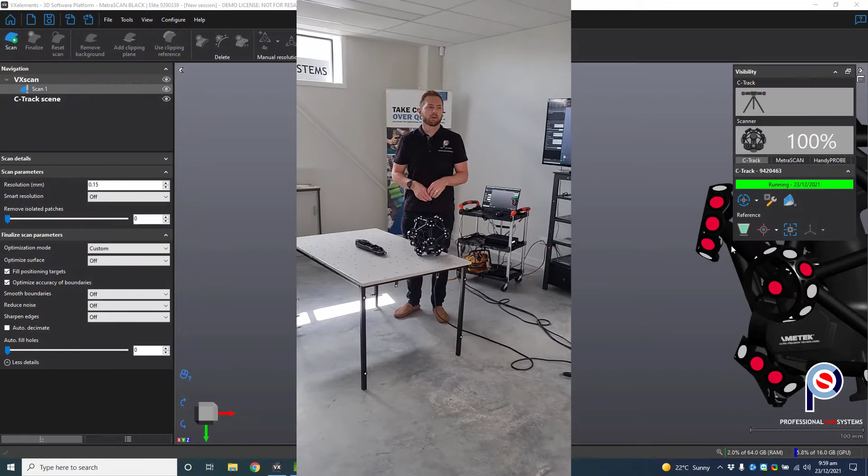Today we're going to show you how to reverse engineer this motorcycle part. It's a very complex shape, nearly impossible to measure with traditional measuring techniques. So we've got Creaform's MetraSCAN, and we're going to show you how to get up and running.

The first thing I need to do before we get started is acquire the targets that I've put on the table, and that will ensure that if this table moves in any way, it's tracking the movement of the part. So we go out into the software.

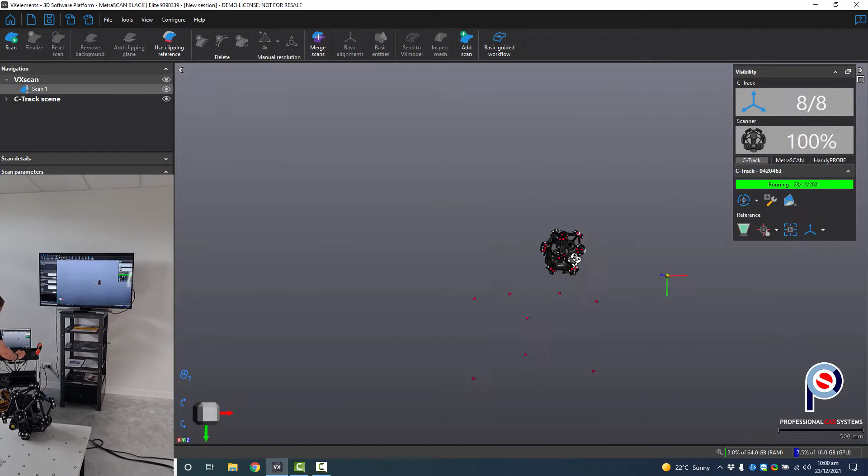I can go and select manual detect, and I just simply drag a selection around those targets and accept it. You can see it's already registered the targets, they're in red. It's already tracking the MetraSCAN. You can see it on the picture. The C-Track's keeping track of that.

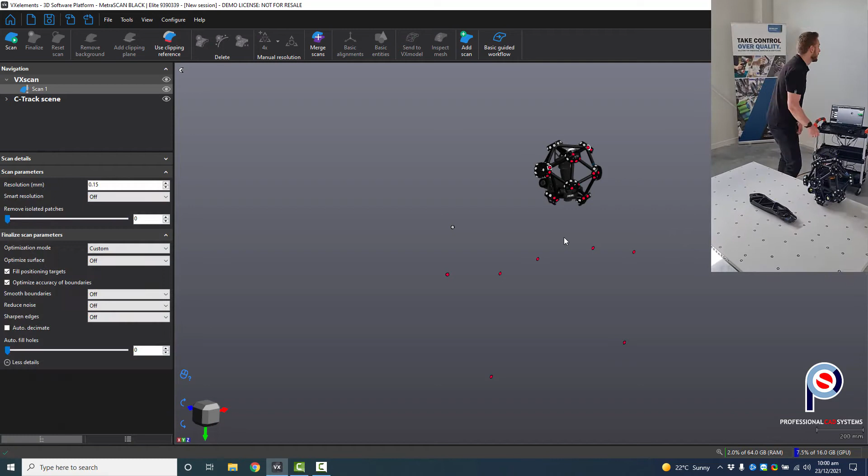Next what I need to do is determine what resolution I need to use to capture the part. So I can go over to the left hand side and I can change the resolution maybe to about 0.8.

What's cool with our software is that we can also adjust some settings before even getting started. So I can click on auto decimate, and we'll put large triangles in the large surface areas and keep small triangles in the small or the high detailed areas.

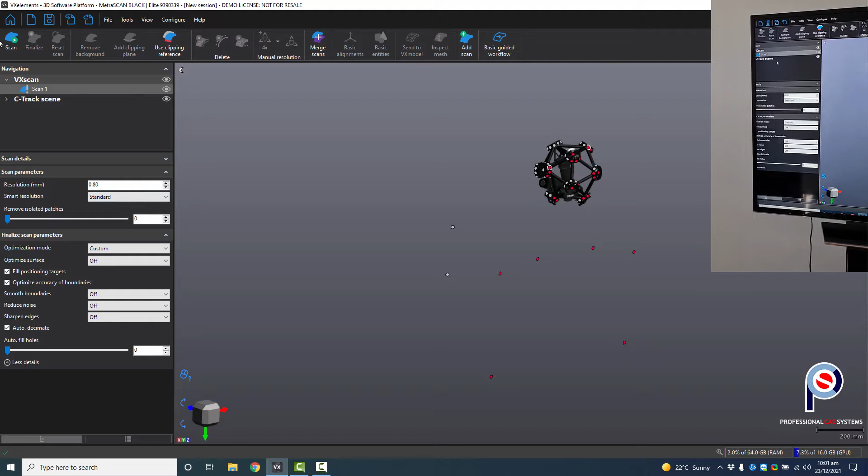We also have a thing called smart resolution. What it will do is put small triangles on the high detailed areas and use bigger triangles in the larger surface areas. Next what I'm going to do is hit scan.

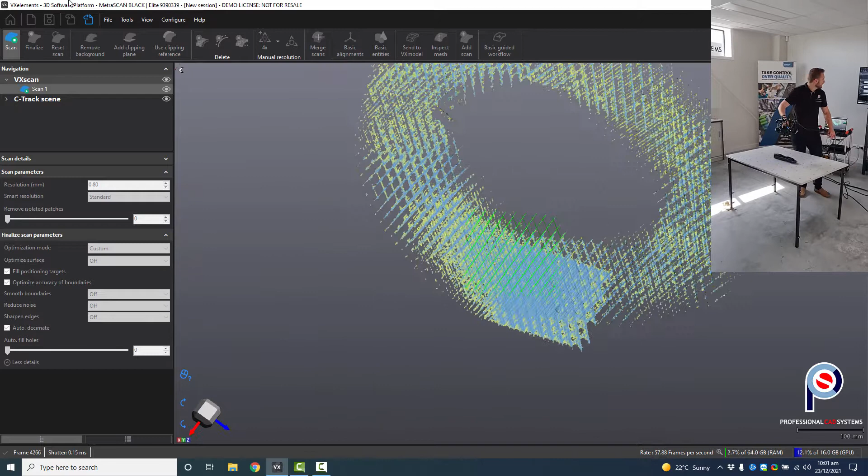Cool. And then I just need to capture a little bit of the table because I basically want to remove that. So just simply scan a bit of that, just enough so I can create a clipping plane.

So next I can go add a clipping plane and just delete that out, because I just don't need it.

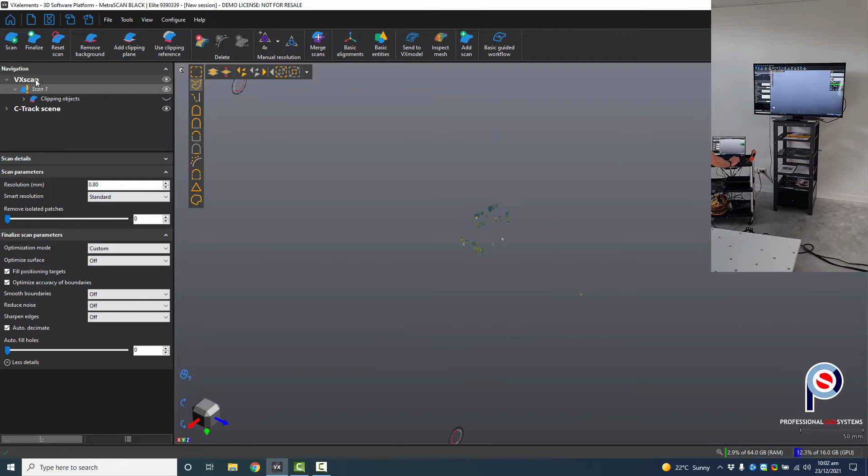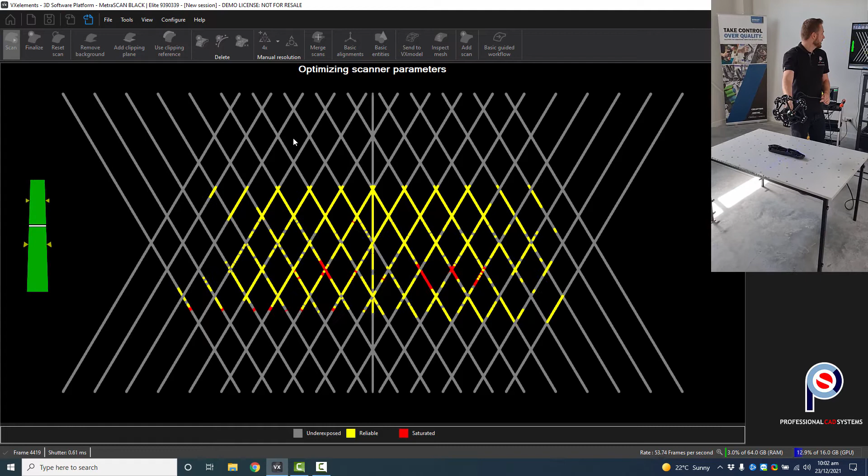The next step is I need to adjust my shutter speed for the laser strength for the part. So I've got these multi-function buttons on the back of the scanner. I can hold the tick down, scroll down to auto adjust, accept that, aim it at the object, and it will automatically adjust to suit. Once it's done, it will exit.

And so at this point, I'm ready to start scanning. I can hold the trigger down on the front of it. That will start the session. Then tap one more time, and we'll start to collect it.

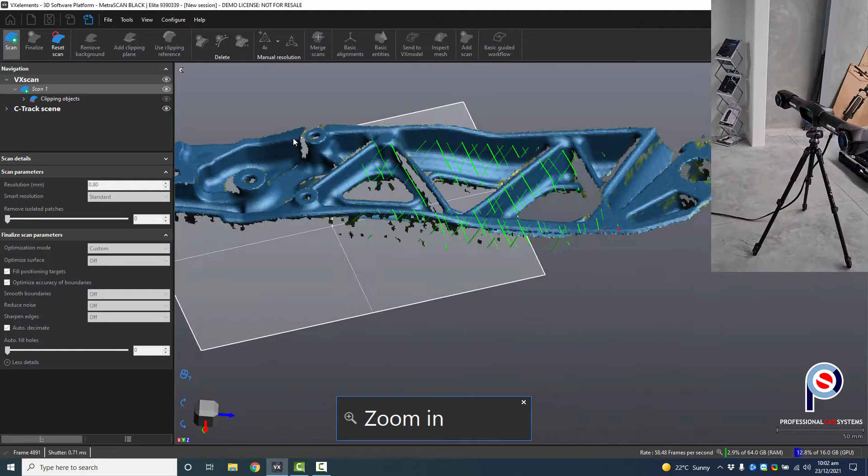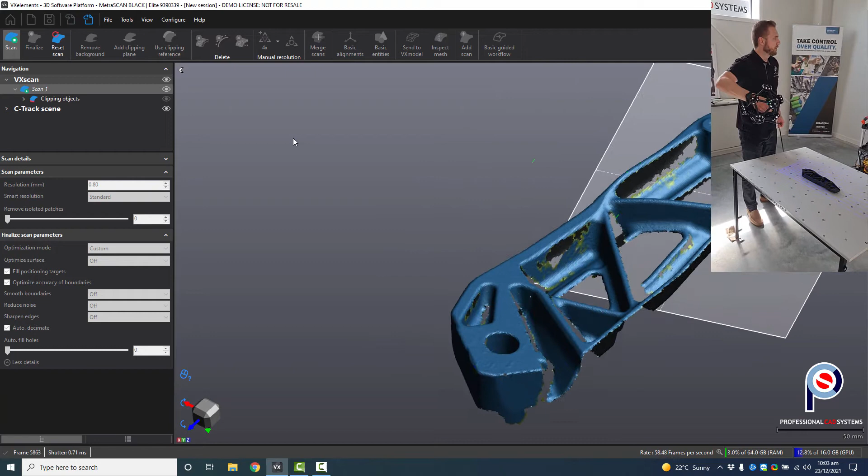So it's just like 3D spray painting. As I go over and over it, it just keeps filling in the gaps. What's quite nice is it has like a distance meter on the lasers on the screen. So if I get too close, it will go red. Too far away, it will go blue. So you're just aiming to be in the green zone.

But it's a very fast scanner. You can just sweep over and over the part as many times as you like, and it will only ever create a single surface.

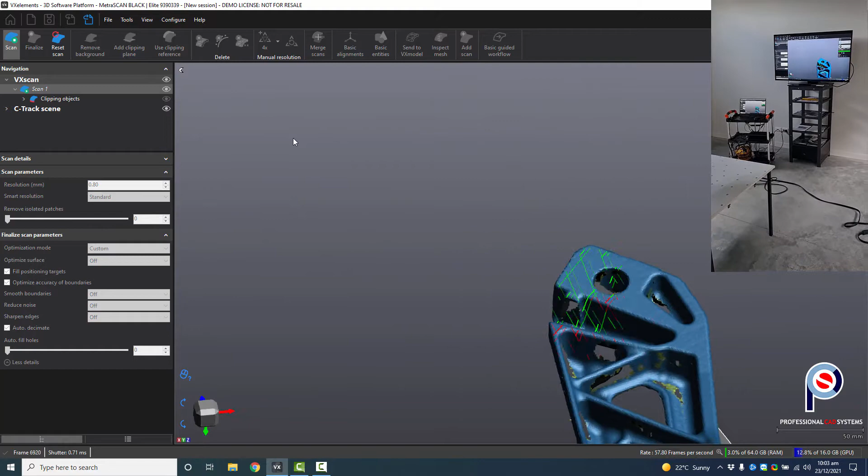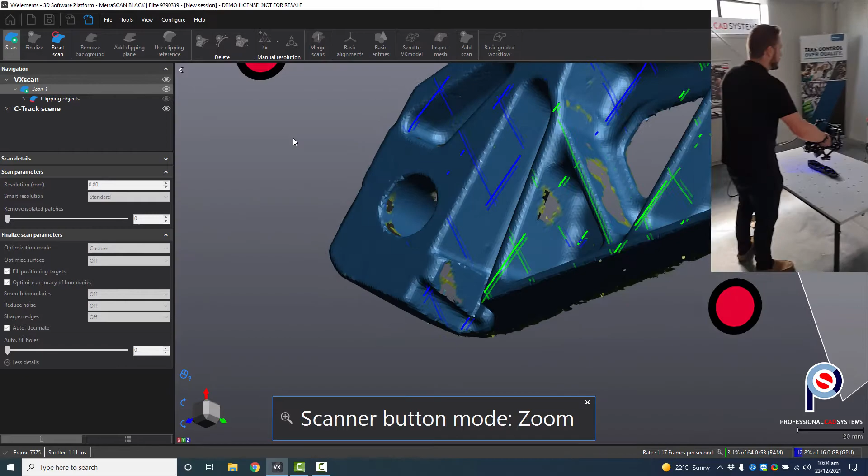If your laser strength isn't quite enough, you can toggle between zooming in and shutter speed. So I can just increase that a little bit more. And then I should be able to capture the surfaces a bit easier now. That's better.

So we'll just go around, make sure we haven't missed anywhere.

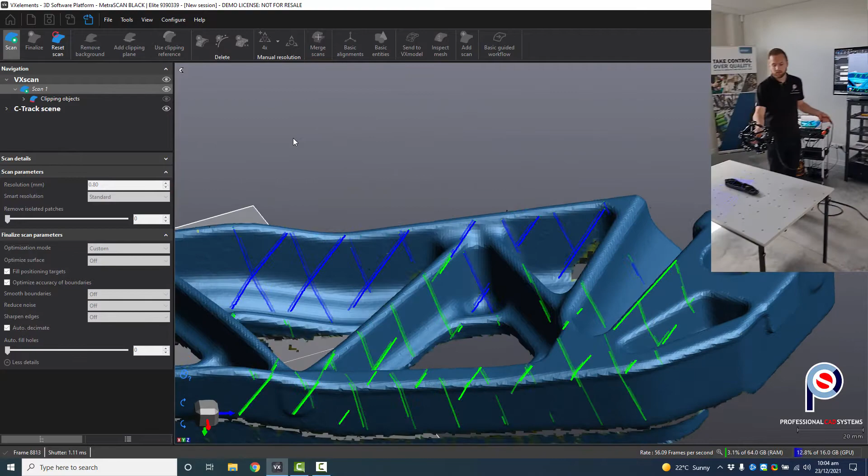What's also quite nice with the Black Elite model is that we get a single laser. So if I double tap the trigger, it'll go down to a single line. And it just makes it a little bit easier getting into those hard to reach areas. Plug in there.

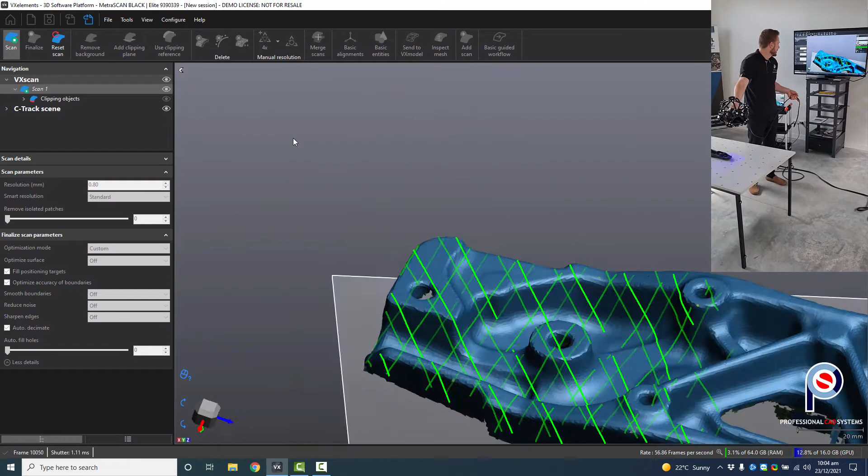You can just flick back to the other laser mode.

Okay, so that's one half done. We can hold the trigger down and press stop.

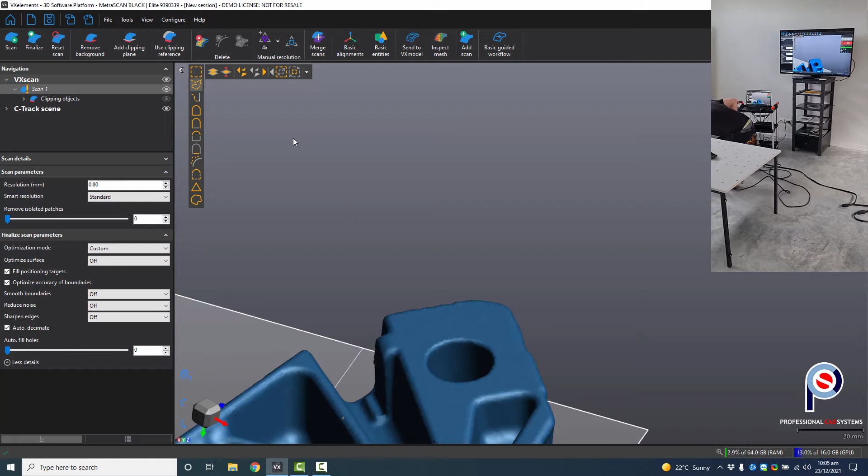Then what you need to do to add the second half is we just click on add a scan, and we can copy the clipping objects. So we'll copy that clipping plane that we created, and then we can use that. It also copies the mesh, so I might delete that.

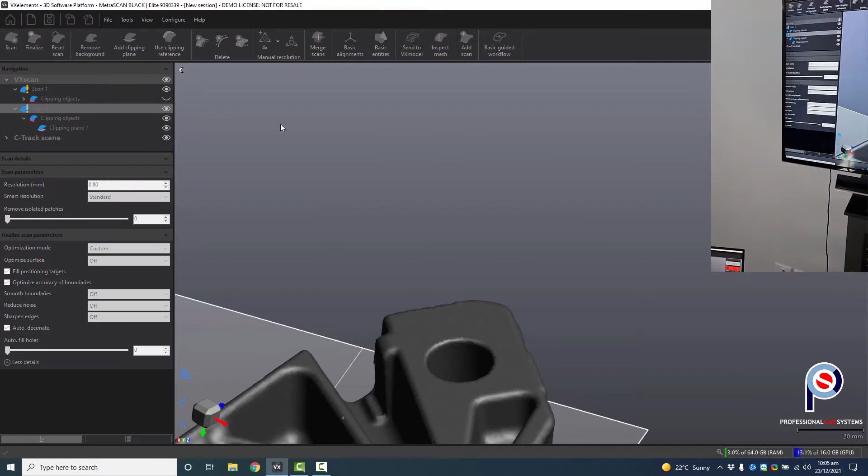Hit scan again, and now we just need to turn the part over. Okay, so when you're ready to scan the other half, again you just hold the trigger down, tap the trigger one more time, and just start scanning again.

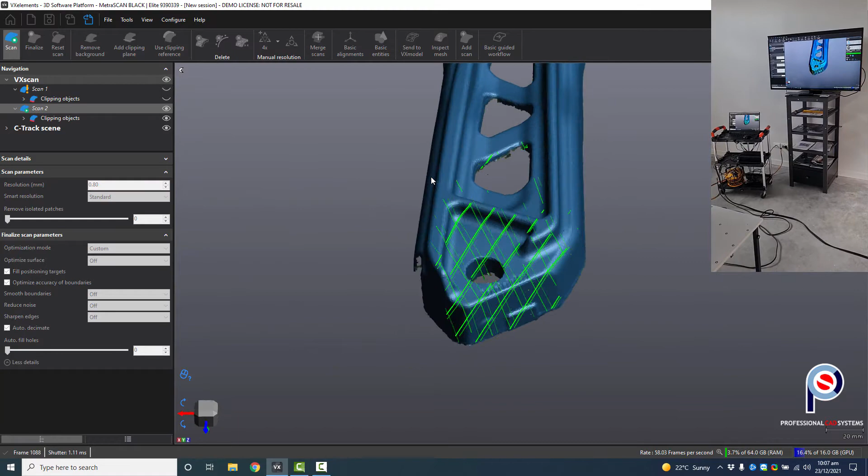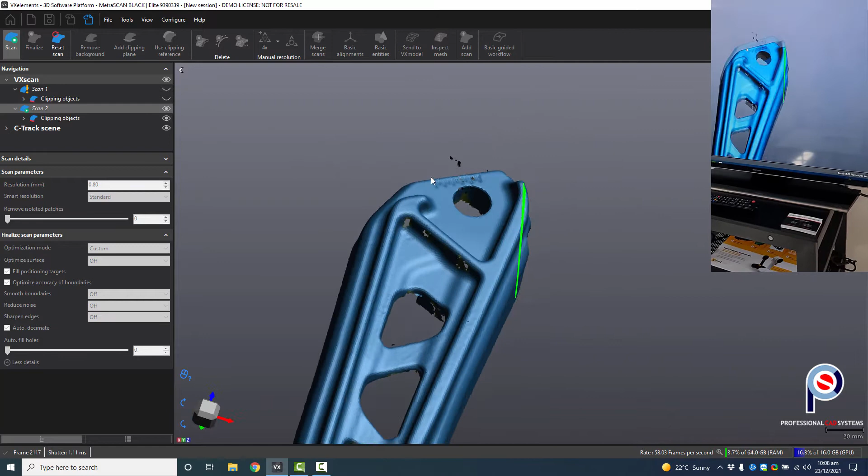And again, I can double tap the trigger just to get into the hard to reach areas. It just gets deep into the holes. So basically it switches to a single lens when you go to the single laser mode.

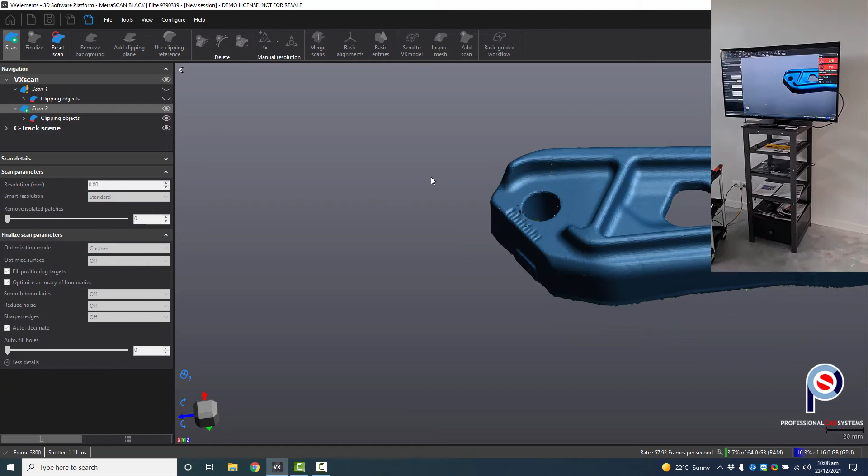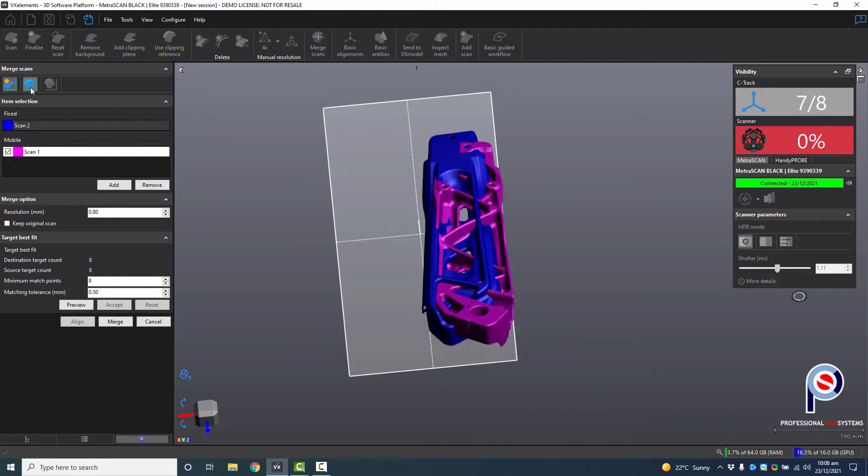Good. So once you're done, you just hold the trigger again, stop the scan, and now we can look at merging the two scans together. So we can go up to merge scan, and we can do a best fit alignment, and we can just click keep the original scans just in case you want them, and we can click best fit automatic alignment, and it should find enough common geometry that it knows the overlapping data.

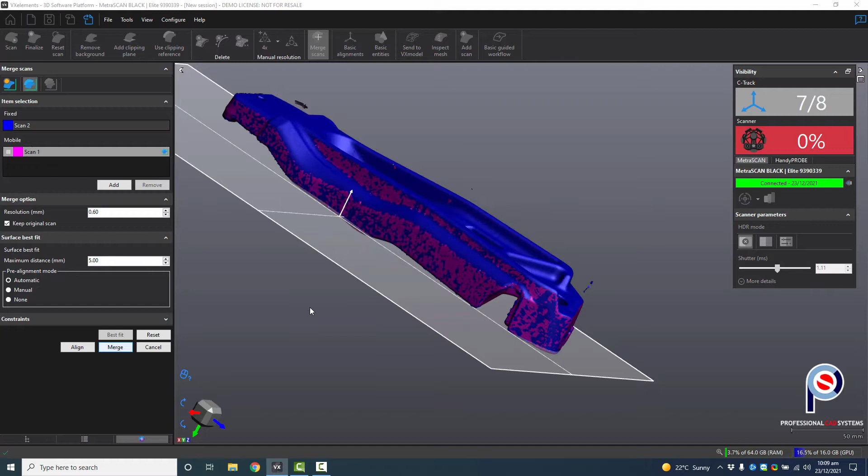And at this point, you're not stuck to using 0.8mm triangles. You can actually increase the resolution even further if you wanted to. So I could say maybe like 0.6. And it will recalculate, redraw on the raw information and reproduce an STL mesh based on that data that we've got in the background.

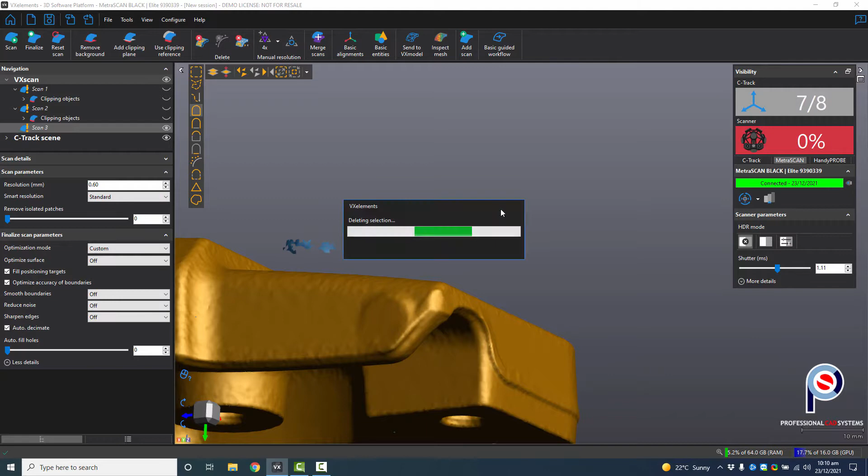So now if we turn off scan 2 and scan 1, you can see we're left with that part. If I get the select tool, I can select all I want to keep because there's a little bit of floating data somewhere, like here. So I select what I want to keep, click on the keep selected delete tool. So keep what you've selected and it will filter out anything else. And once you're happy, you just click on finalize.

And it's just going through and adding in those post or pre-processes that we put in place, the auto decimate, any hole filling and stuff like that. And there's the finished result.

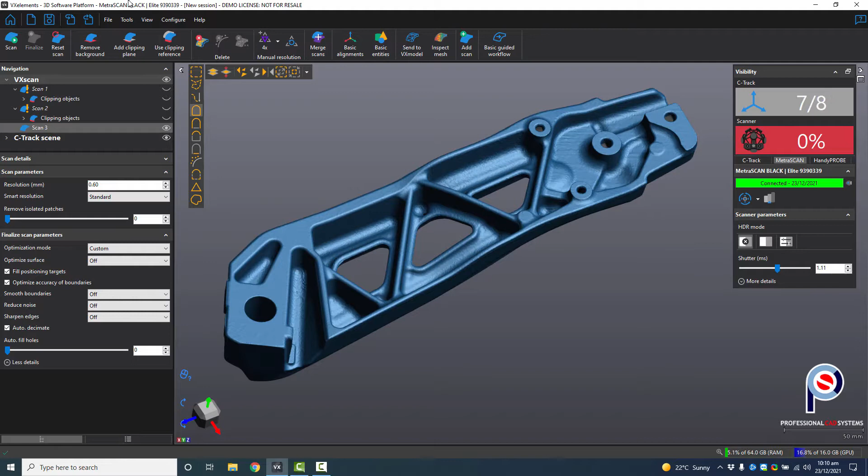So when you're happy with your information, all you need to do is export to mesh. So we just go File, Export, Mesh. And then I also like to save the session because that contains all that raw information if you ever want to change the resolution, add more detail.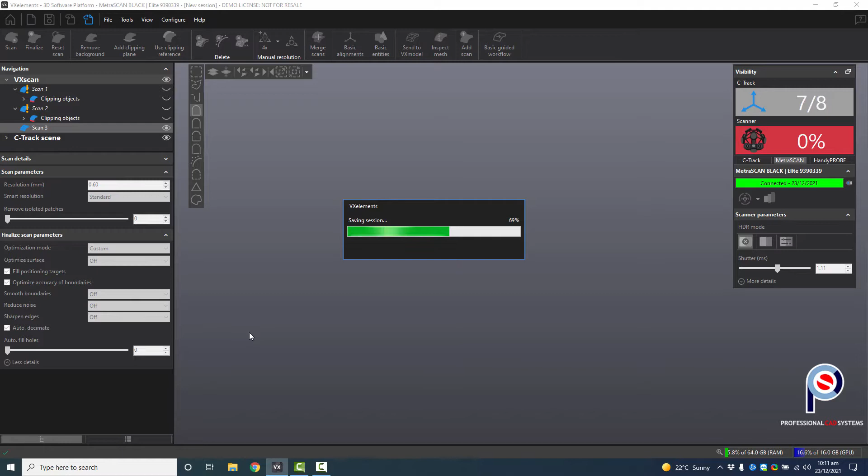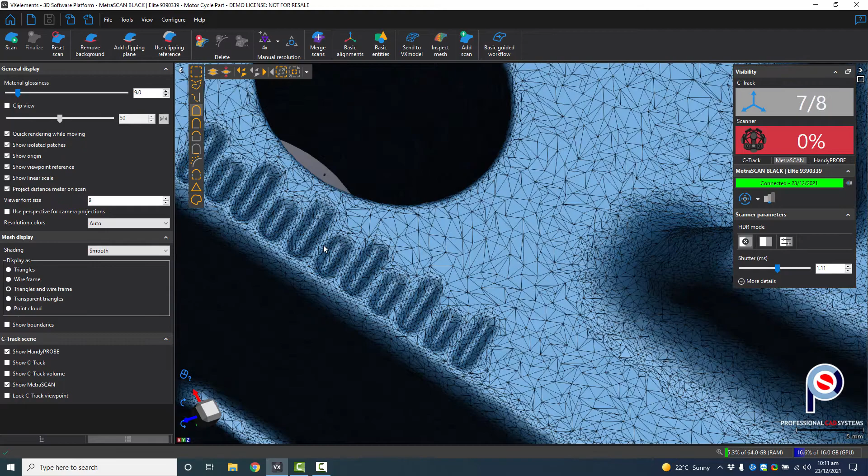And then lastly, before we stop the scan, I'll just show you how it looks, how the triangles are formulated, how they're all stacked together. So you can see the details that we're getting here. If I go to there, I can go triangles and wireframe, and you can see there's the larger triangles, and on the smaller or sharper edges, you can see it's got more triangles, more density. So it really optimizes the mesh for you to export and use for reverse engineering.

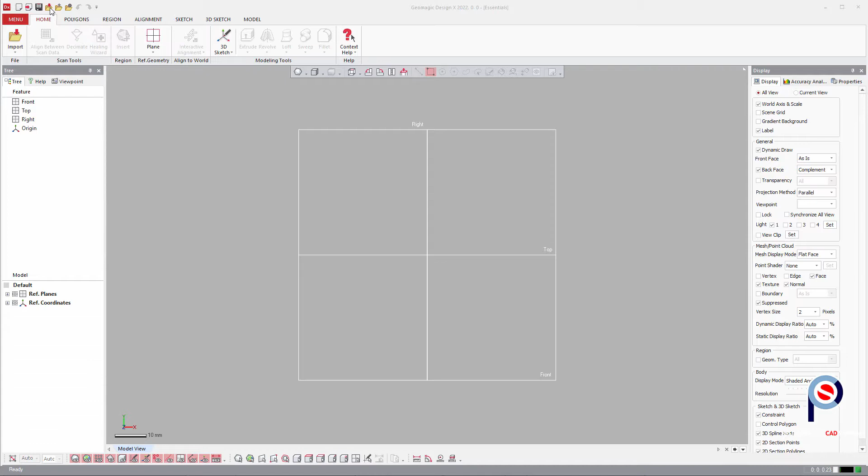Okay, so now that we've finished 3D scanning the motorcycle part, we're going to look at Geomagic Design X Essentials to reverse engineer the part. So first we need to go to Import, and we can import the STL file, and it comes in as a mesh, obviously.

So what I'm going to do is just create a couple of regions, and regions are useful for extracting things like planes or cylinders. So we're going to grab the Smart Selection tool, and I'm going to left click and drag my mouse up, and it will start to find that plane.

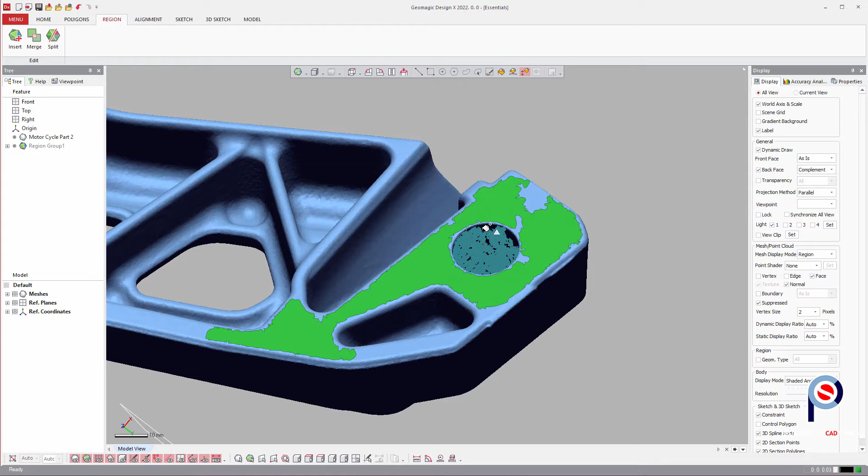Then under the region menu I can click Insert and just insert a plane. Go to the cylinder, left click and drag it upwards, and it just starts to select the cylinder. Insert. On the side here we're going to add a plane, and then insert. So I'm just creating these features or these regions to help with my alignment.

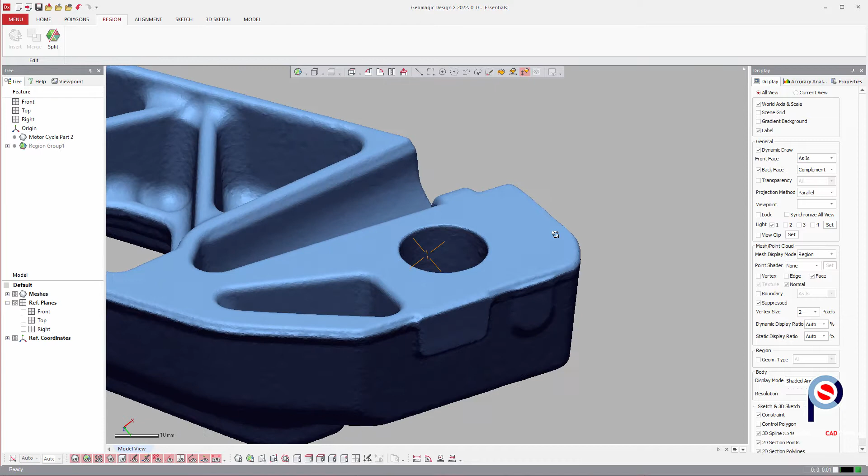Okay, and then before we carry on, next we'll go to Model, and I'm going to add a plane. So I can now filter and find regions, and click on that plane and go Preview, and it fits a plane onto that region real quickly. So it's quite useful for quickly selecting things as well.

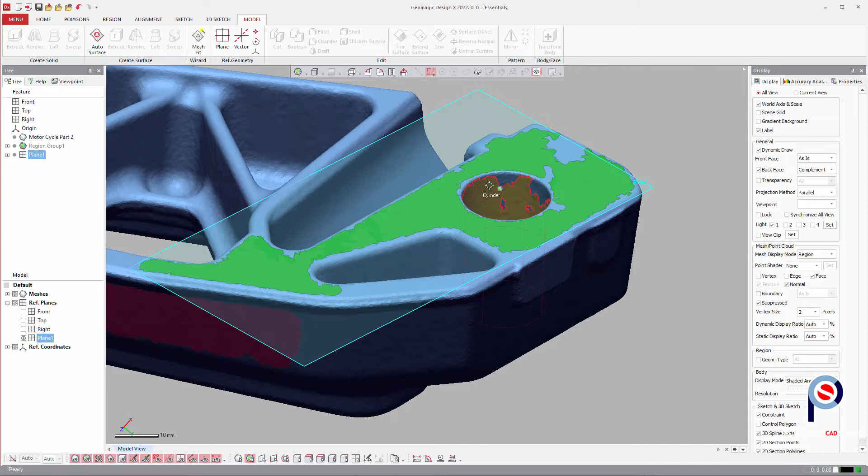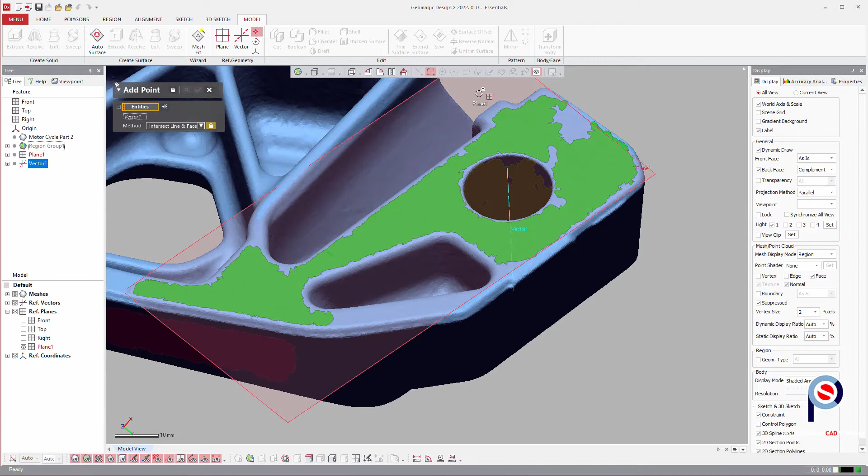I can now add the cylinder, and I'm going to find a vector, and I'm going to find the cylinder's axis and accept that. And next I'm going to create a point, and I'm going to use the vector and the plane. So we're going to use line and face intersection, and it fits a point where the line and the face intersect, or the plane intersect, and accept. So now that we have these entities, we can now do an alignment.

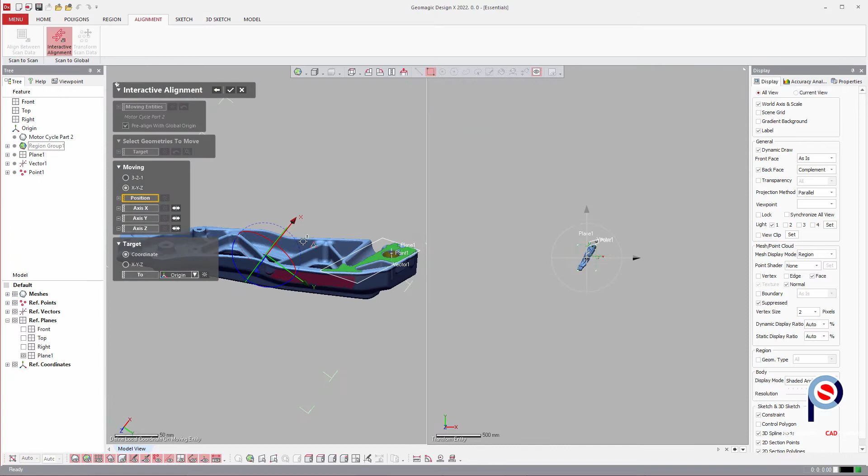So we go to the alignment menu, interactive alignment, and it's already pre-aligned, so I'm going to go next, and it just splits the screen, so it gives you an idea of as you're doing your alignment how it's looking. So my position, I'm going to use the point, and that just sets the origin. The y-axis, I'm going to use the vector, and it's hiding, so I'm just going to click on it here in the tree. And then lastly, for either X or Z, I can use the side plane, and that will lock it.

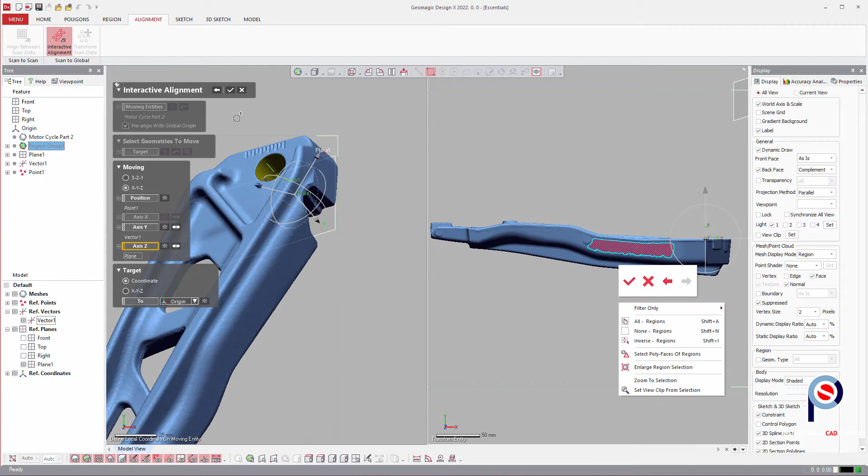If I didn't want to use X, I just click on Z and select that, and it now has aligned it. And you can see on the right hand side it's now aligned to a coordinate system, and I can now accept it. And if I just use Alt 1, 2, 3, 4, you can see it's all aligned how I wanted it to be.

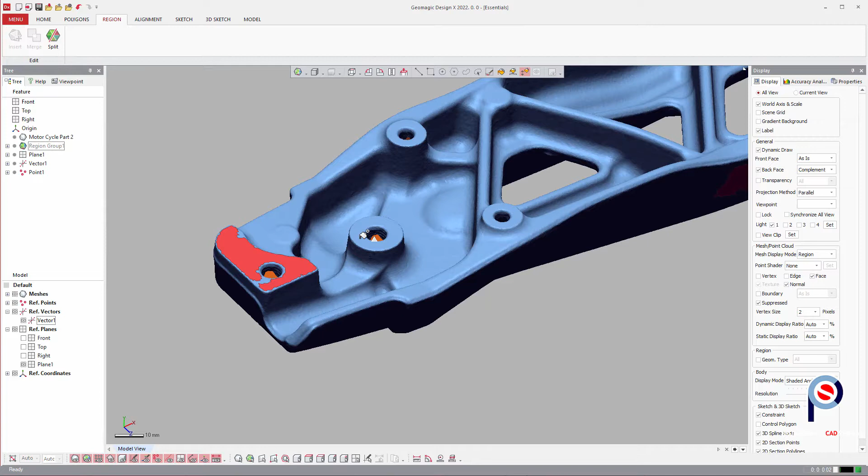Next I'm going to add a few more regions. So we'll go back to Region and use that selection tool. I need to be in the region group. Select this plane and add that region, then holding shift I can add more to the selection and insert a plane, because that's at the same height and level.

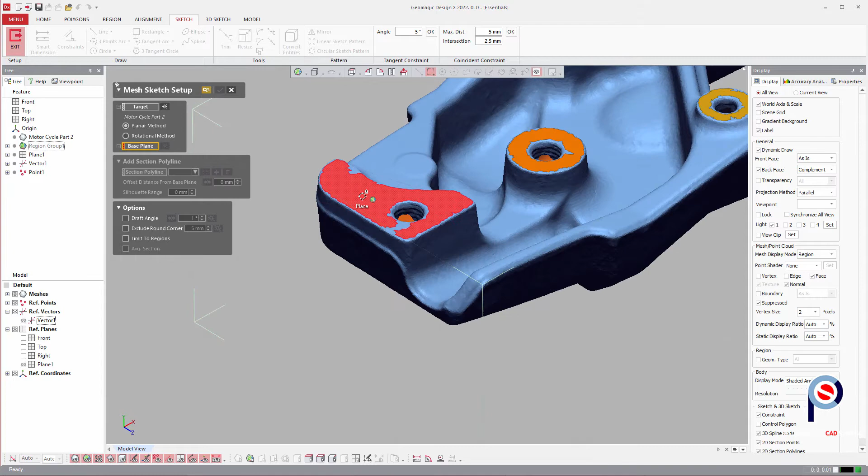Next I'm going to go to Sketch and select Mesh Sketch. I can click on a plane to begin from, then take that down approximately 1.5 millimeters to get the outline. What I'm after is the circle on the inside at the moment. Okay, accept that.

Next I use a circle tool, double click on the circle, and that fits the circle to it. After creating that circle I go to Smart Dimension and check the dimensions of that. It's up to you, but usually we just make it round numbers, so I'll double click on that and type 7, and it will adjust the radius of that.

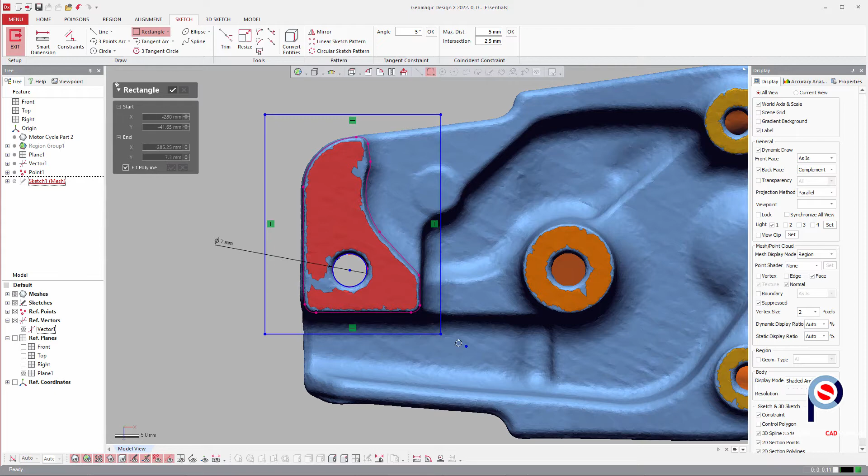Next we go to rectangle and I'm just going to draw a rectangle around here, you'll see why later. I'm going to use this rectangle as basically a cutting plane, so we'll come back to that. Escape.

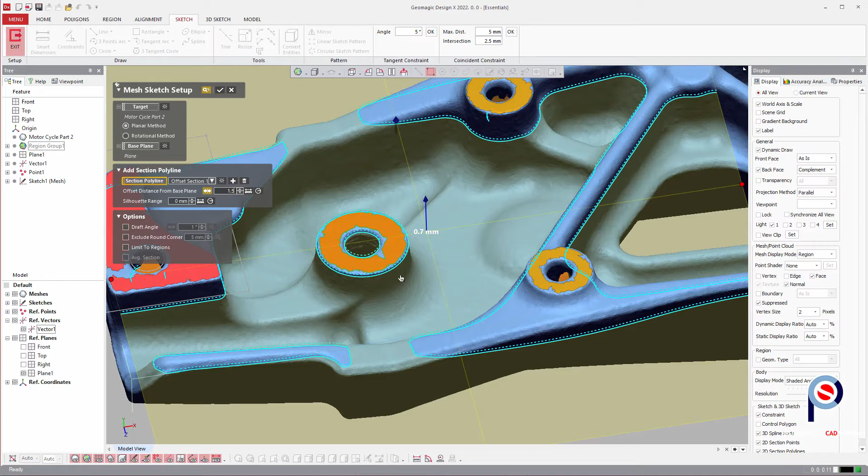Now we just need to do each of the other sections, each of the other mounting points. So we go to Mesh Sketch again, repeat the process, approximately 1.5 lower. You don't have to adjust this cross section, but if you don't want additional information in there, it's quite useful to do. Circle tool, then a rectangle as well, and accept. Smart dimension, again it's 7mm, so we double click on that and type 7.

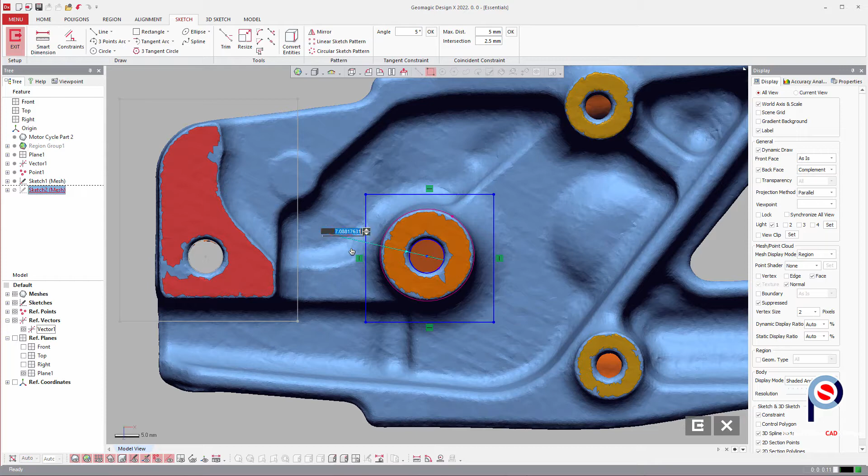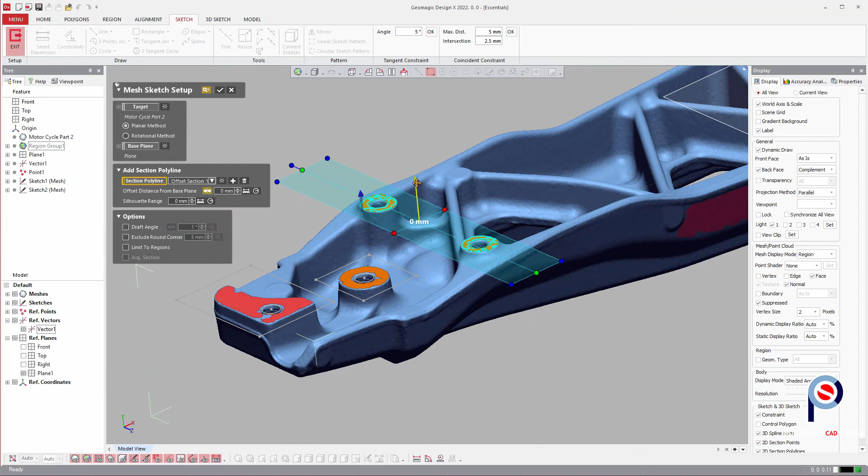Exit out of that mesh sketch, and then again we'll select the region, sketch, mesh sketch, and this time we're only focusing on these two mounting points, and just bring that down. We'll do it 1mm lower this time. Accept.

Circle tool, double click, rectangle tool, just draw a rectangle around there, and smart dimension. So it's 5.3, so we'll just say 5. Then we can exit that mesh sketch.

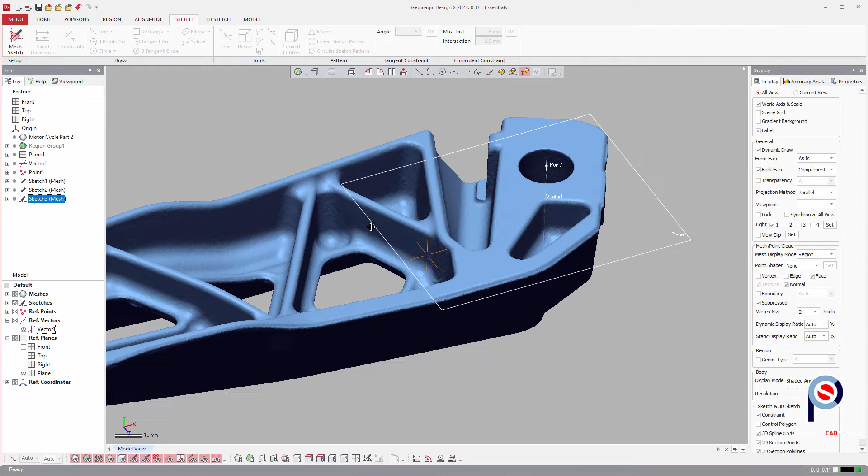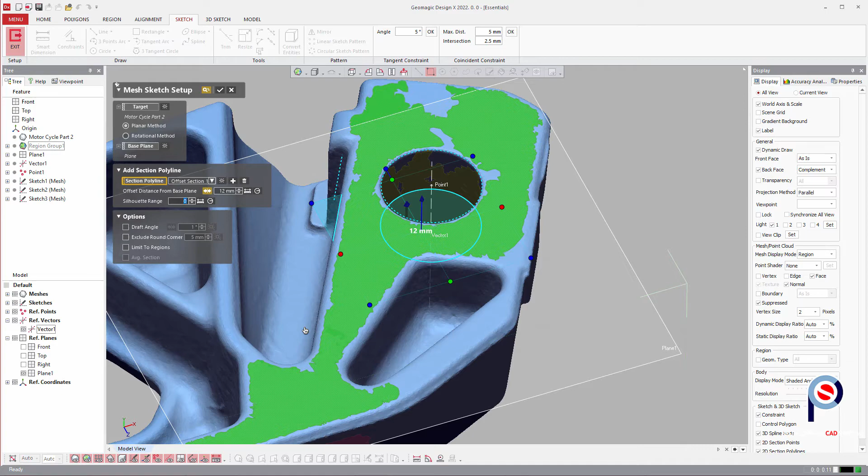Then we want to do a mesh sketch on here just to get the cylinder shape, so I'll go sketch again, mesh sketch, and we'll just bring that down. If you wanted more of an average of that cylinder, you could take the mesh sketch lower, then say I want a silhouette of maybe like 10, and the silhouette will give you a better average of the whole opening, taking more points into account for creating that vector.

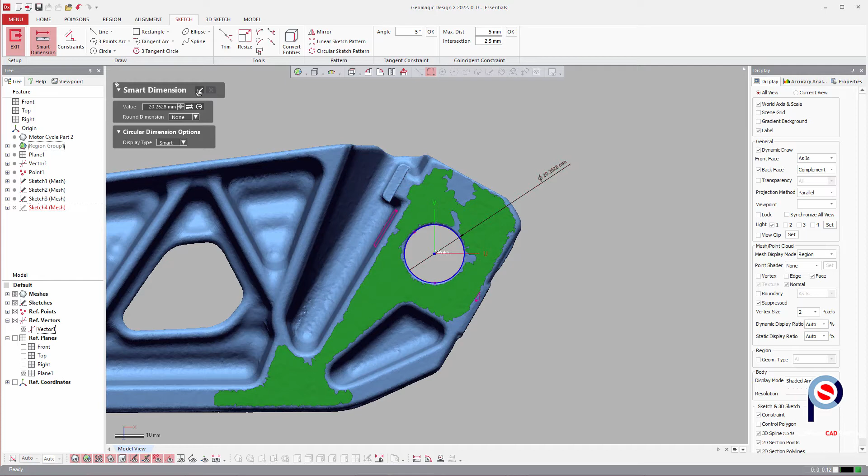Then I can get the circle tool, fit that on, and give it a dimension. Okay, so we'll go 20mm.

Okay, so right now I've got the mounting points that I want, everything I need. We're going to add those planes and the mounting points back to the part later, but for now what we're going to do is remove them and auto surface the part.

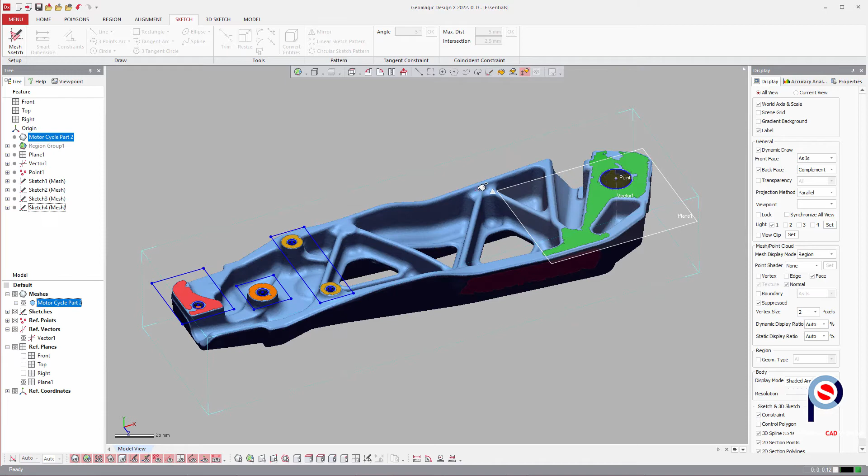So we go to the mesh here, make sure it's active, and we just need to select everything. Control A is a great way of doing that, or you can get the paint bucket and click straight on the mesh and it selects all. Now that I've done that, we can go Control C to copy everything, then Control V to paste the mesh. So we now have the exact same mesh.

So once we've finished creating the mesh sketches and after copying the mesh, we can now remove the holes because we're going to add or subtract those later from the solid.

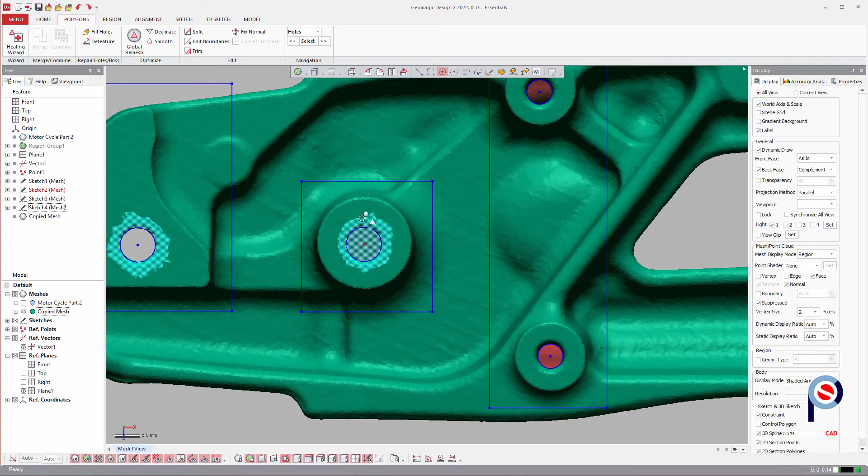So I'm going to use the circle selection tool, and I'm going to turn off visible only so that I can select through. Just drag that up, and go select those holes, holding shift, and by holding shift I can just keep adding to the selection.

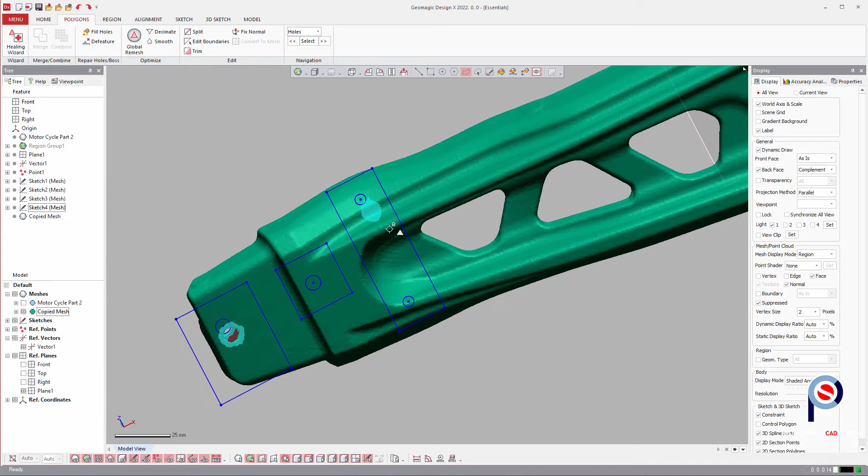Once I've done that with select through, I just need to deselect these areas here because I want to keep them. So I switch back to lasso, turn select through off, select visible on again so I don't select through, and just deselect holding control what I want to keep. Now press delete on your keyboard and it should just remove only the holes.

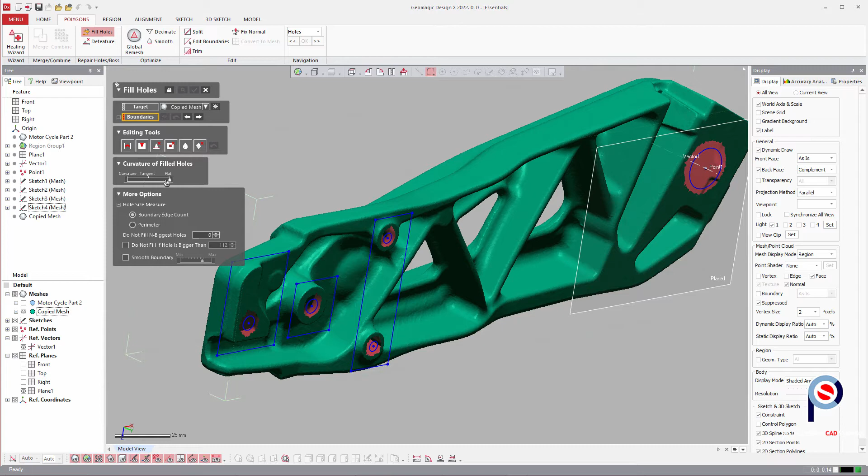So now we can get the hole filling tools under polygons, and click on fill holes. I'm going to select boundaries and make sure that the way I fill those boundaries is flat because it's just a flat surface. So you go through and click on those boundaries where those holes should be, hole filling just those areas there. Okay, accept, and it will flat fill those, leaving it basically a solid mesh.

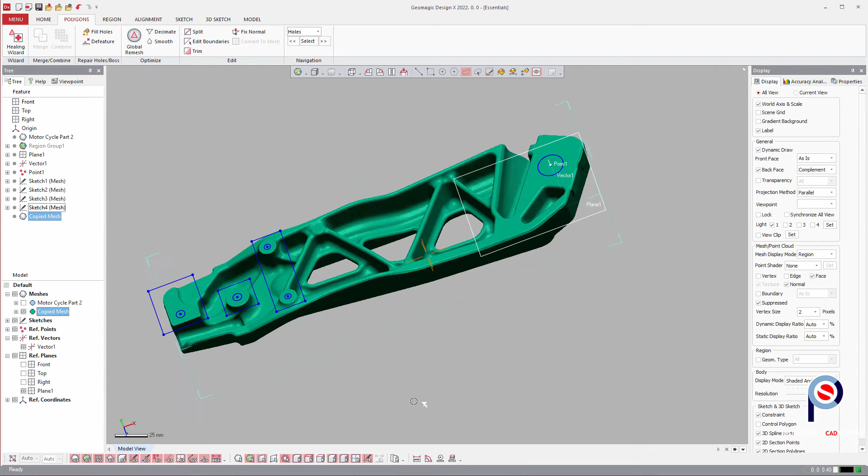I can just turn off the sketches for the moment and turn off that plane, so you can see we've only got basically the mesh showing, and maybe I'll just turn off the vector and the point.

Okay, so the next step is you go to model, then click on auto surface, and it's a mechanical part, so we'll leave that as mechanical. The capture accuracy, you could play around with that. You can set a specific target patch count if you wanted to, but if you auto estimate it'll basically work it out for you.

So we can go next and just allow it to do the auto surfacing. Basically we're just shrink wrapping lots of CAD surfaces or NURBS around the scan data, and it's a really useful tool for organic shapes where 3D modeling might take a lot more time than what's needed. Because if you're just replicating this part, you're just wanting to make it a solid and create clean machine surfaces. So that's what we're aiming to do here.

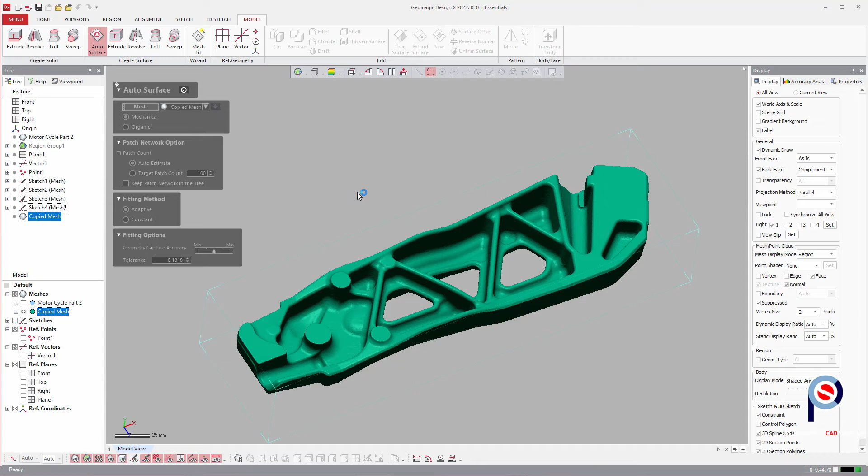Okay, so you'll soon see a network of patches over top of it, and it's quite intuitive, it tries to just follow the contours of the part. So the mesh layout or the CAD patch layout is quite uniform, and then we can accept that.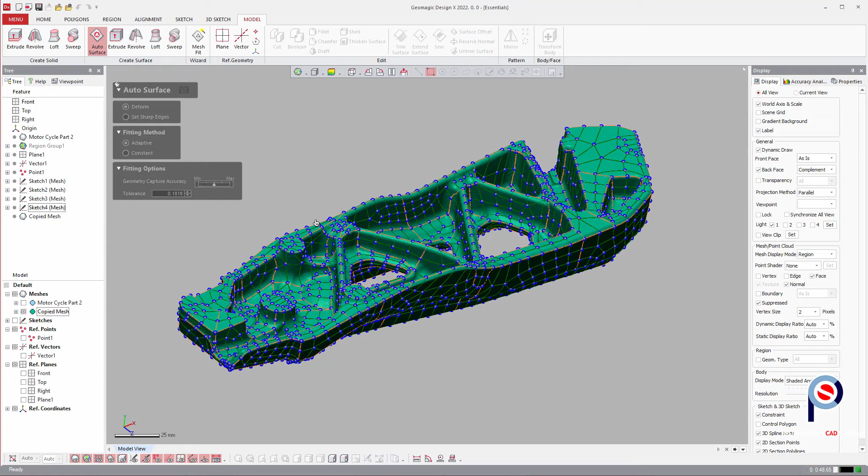Okay, so the auto surface is completed, and that actually generates a solid. So you can see here we actually have a solid body now. So what we want to do is create machine surfaces on where these mounting points will be.

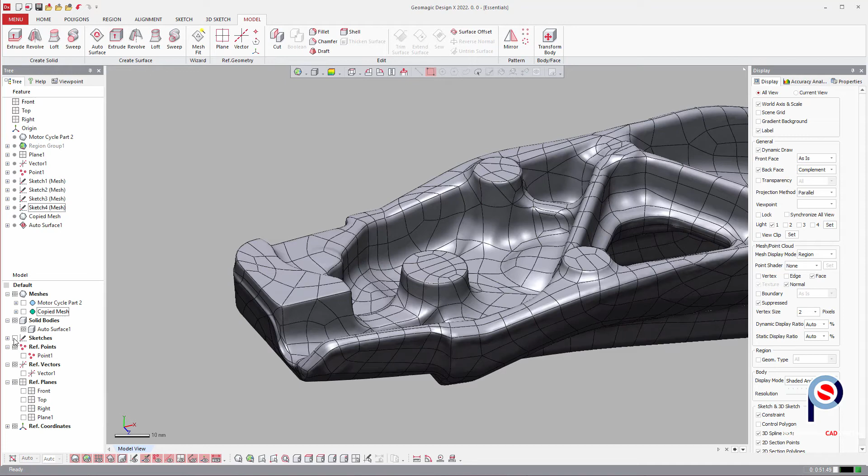So if we turn back on the sketch now, we could go to model, extrude, and just click on that, and I'll extrude both the circle and the rectangle, and we'll go the opposite direction 1 millimeter, so it just cuts down 1 millimeter, and we select cut, enter.

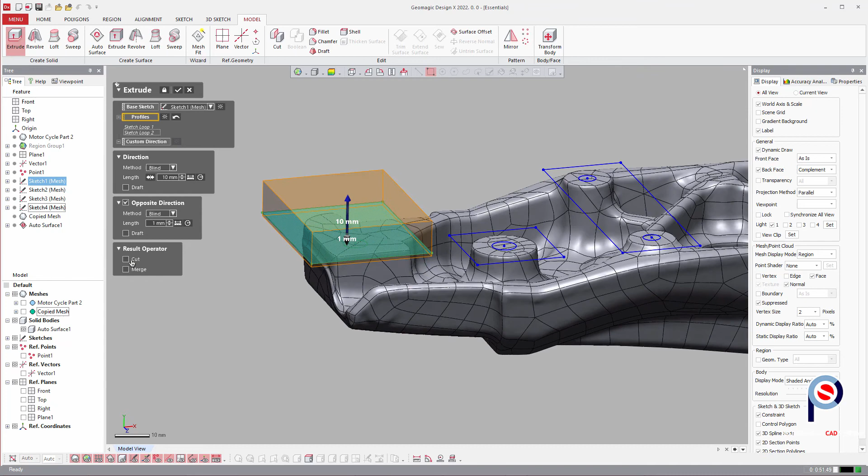We're going to then offset that another 1 mil back up to the right height as well later. So we then go control space, and that puts us back in the same tool, and we again repeat the process.

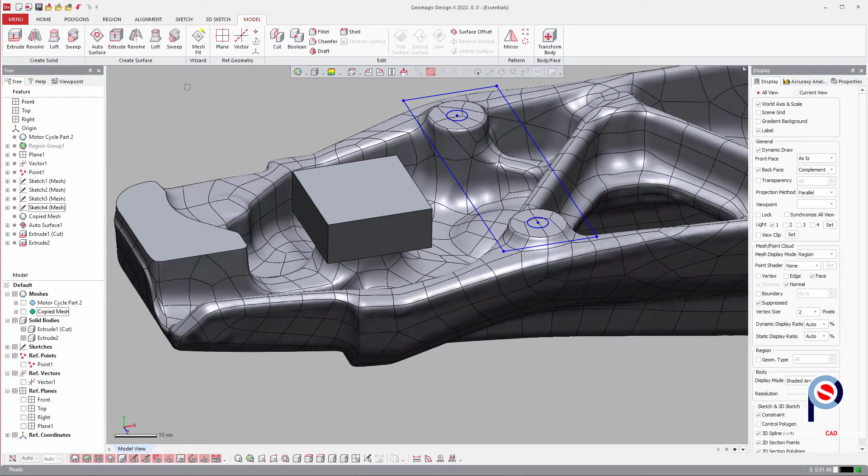Oops. Since it's parametric, I accidentally forgot to select cut, so I can double click on the extrude that we did, make sure you choose cut and OK. And then control space, base sketch again, we just choose the sketch, opposite direction, 1 millimeter, cut, OK.

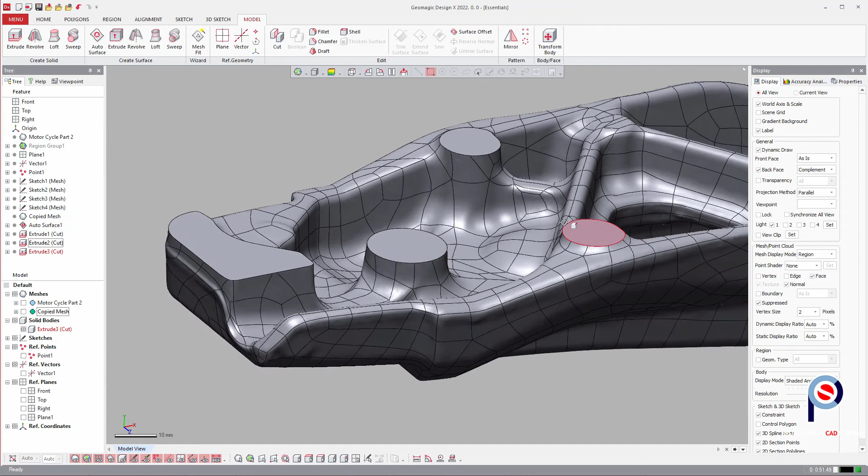Okay, so since this is the Essentials version of Geomagic Design X, there's a little bit less tools. Like with the full version, I should be able to just extrude these surfaces straight up and merge them back up 1 millimeter. But since it's slightly cut down, we have to do it a different way.

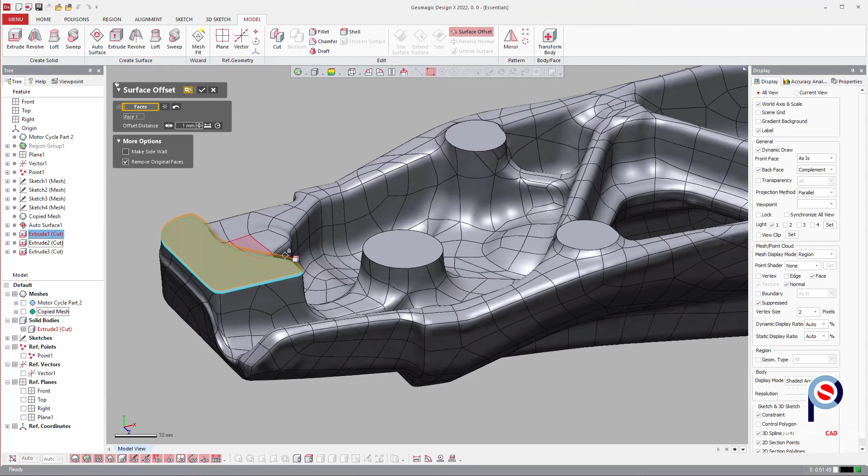So we gotta go to Surface Offset. We just choose the faces, and you can see they're being offset 1 millimeter upwards. And we don't want to remove the original faces, we want to leave that as a solid. So we go OK.

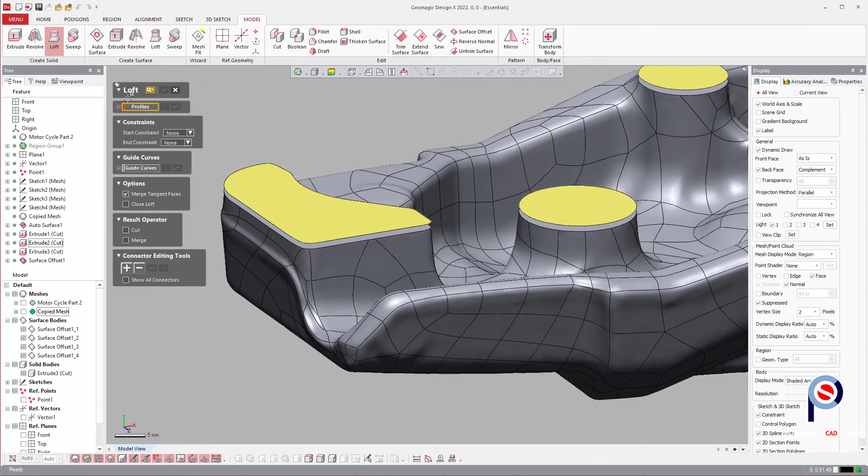So we've just set the height for what we want to extrude it to. The workaround is we could go loft, and we choose the profile as the face here. So we zoom in a bit, and we just choose the surface above, and it will loft it up to that face. Again, repeat, control space, click, click, enter, control space.

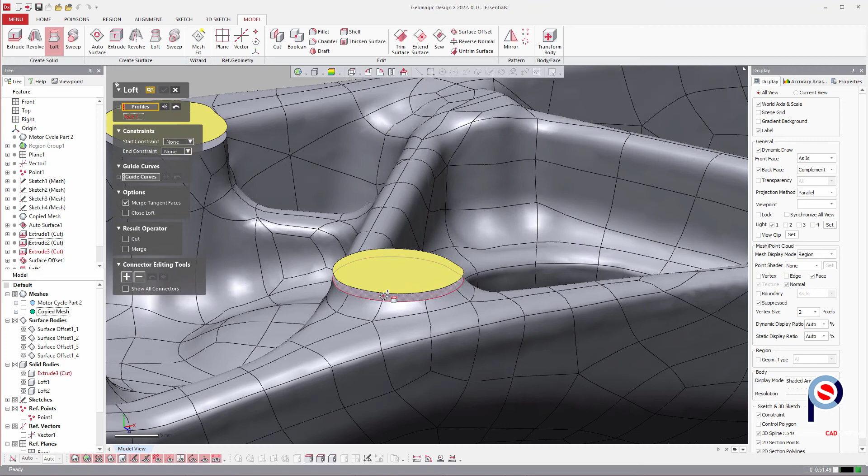Oops, got the wrong one, so you just deselect that, make sure you get the face, and then control space. Okay, so we just now extruded those machine cut surfaces back up. So once that's done, you can turn off those surfaces that we used just as a tool to offset up to, and it's still a solid, right?

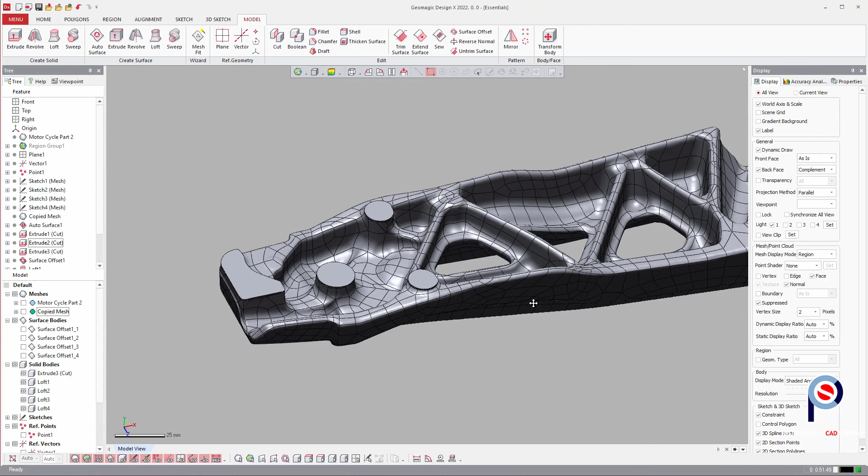So now we can do our cut throughs with our bosses, so we can go extrude, choose the sketch, and we may be able to do both at once, so we'll just turn on those sketches again. I'm gonna choose this other profile here.

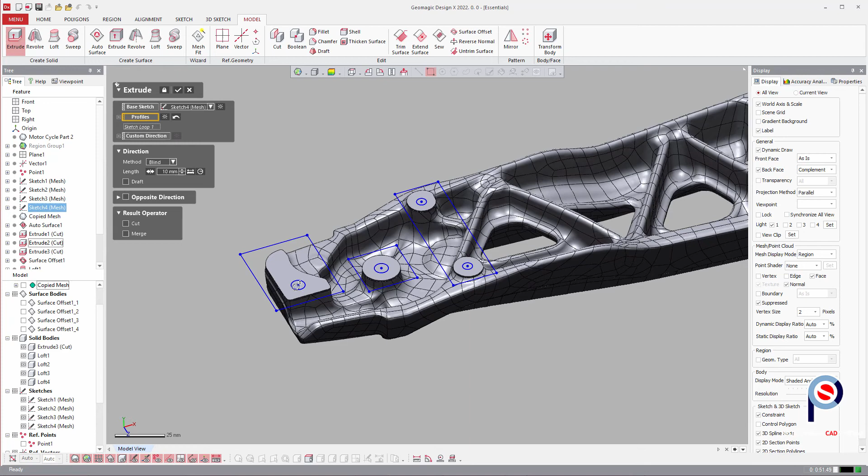Okay, let's just do one at a time, and we'll go opposite direction and just take that right through, and then we can cut that away.

So then over here we just go extrude, and we want to only do that and not that. Opposite direction, cut, accept.

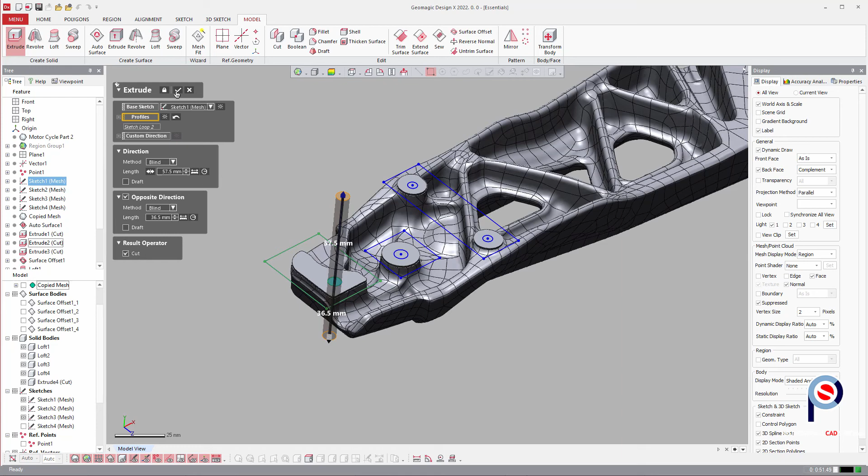And then these ones here, control space, we repeat the process, and we just want to go the opposite direction, and we'll just go down, let's say 5mm, but we can work that out later. Accept.

But I forgot to choose cut, so we can edit that extrusion again, make sure you select cut. Control space, click on the sketch, opposite direction. It's remembered the 5mm but not the cut, so we tick that and accept.

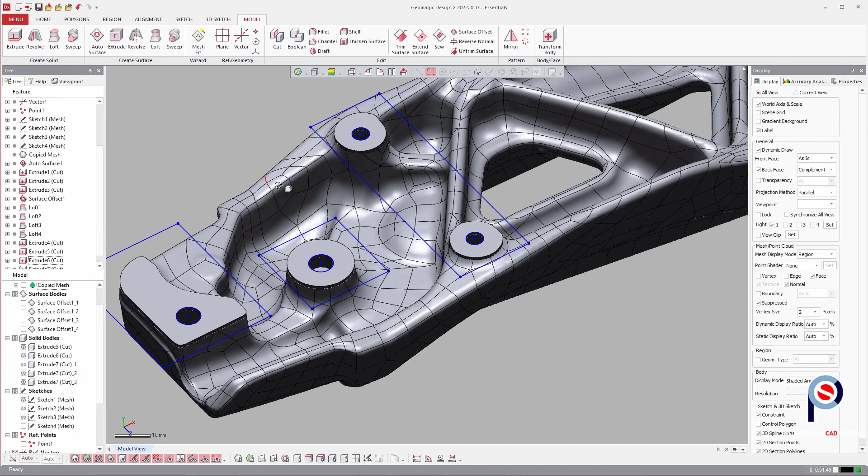And we've now completed our part. So you can see now we have a solid, we've got nicely cut bosses, machine surfaces, and we can now re-engineer this or re-CNC it.